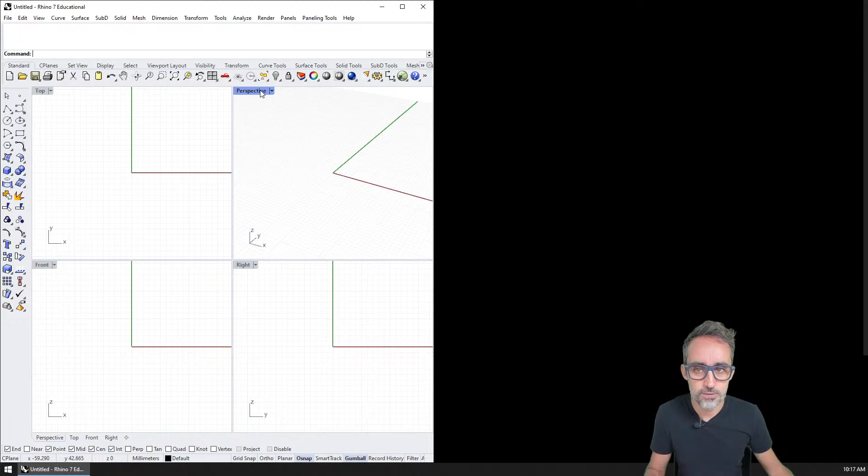Wait. What is my Rhino here? Okay. Any questions? I need to set up a couple of things. Any questions before we start? Any other? So 21, 9. What is it today? 29? It is 29. Yeah. Okay. And now I'm going to, yes.

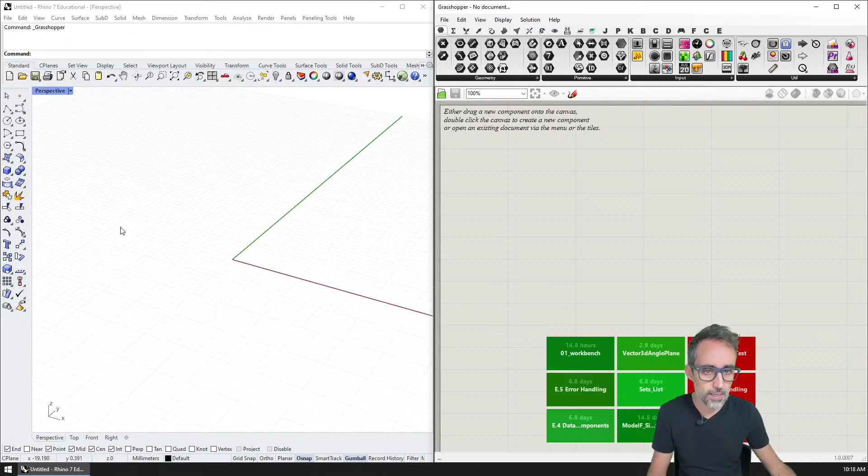So the next video is going to be persistent data. So what are we going to do? I'm going to record a video. What was the last video? In the last video we did error handling, and I made this video called Understanding Script Instances. And then we opened this, and then I started unpacking this and this and this, right?

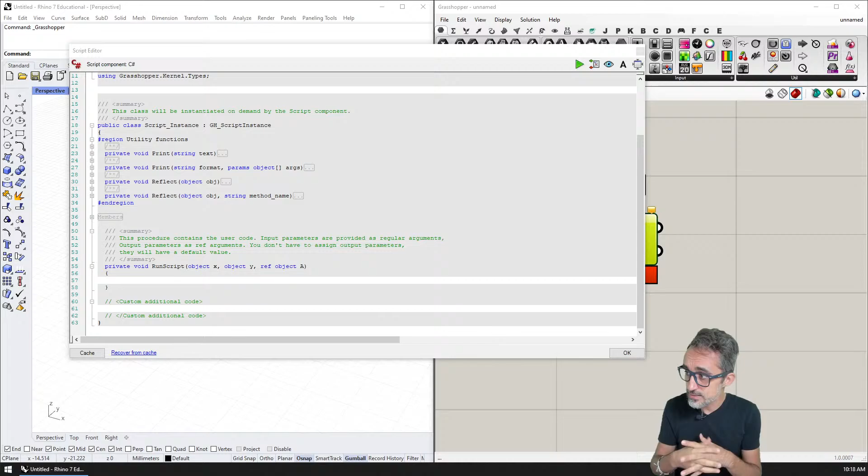And so what I would like to focus on today is this area here, custom additional code. I'm going to talk about writing functions there. Yes, I actually have it on my notes already. So we're going to write reusable functions there, and we're going to add a class. So the first one is going to be extending the custom additional code. That's going to be one video. The second video is going to be persistent data, that's where I'm going to talk about things that move around, etc.

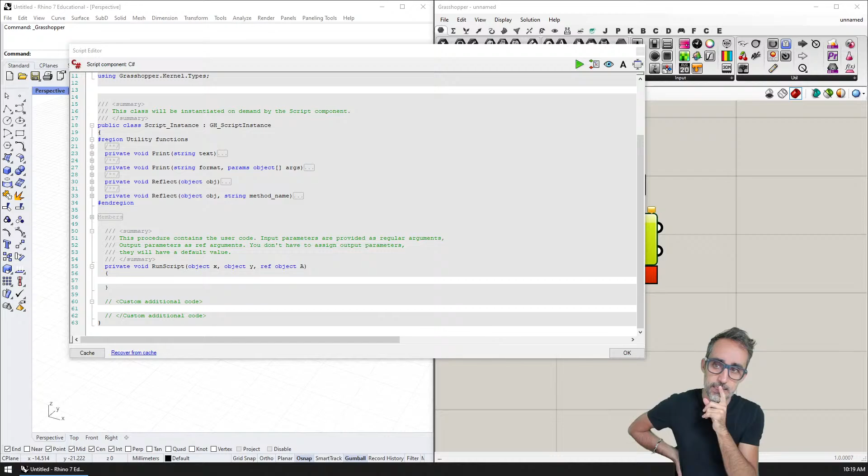Yes. That's what I'm going to talk about. Yes, exactly. So which example am I going to do? I don't need to do a complicated example here because that will come on the next. So in this video, I don't need an introduction. How am I doing battery-wise? I don't need an introduction. So how am I going to start this?

I'm going to start by double clicking here and explaining how using, okay. I'm going to start by showing this and showing how in the previous video we're talking about all these members and the utility functions, etc. There is the using, which I will talk about in a few, but I would like to focus here today on the custom additional code.

I need a good name for this video. I'm going to ask you for a name for this video. Yeah. What about extending script functionality? That sounds like a terrible name. Yeah, I'm not sure about that. Okay, I'll think about it.

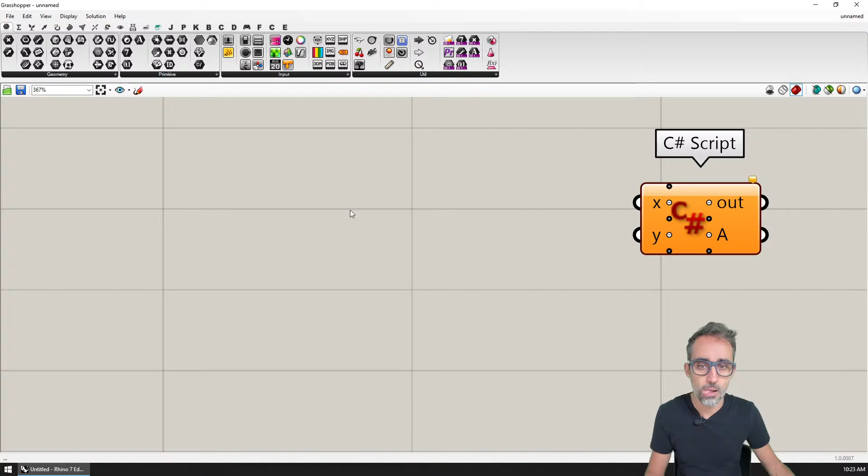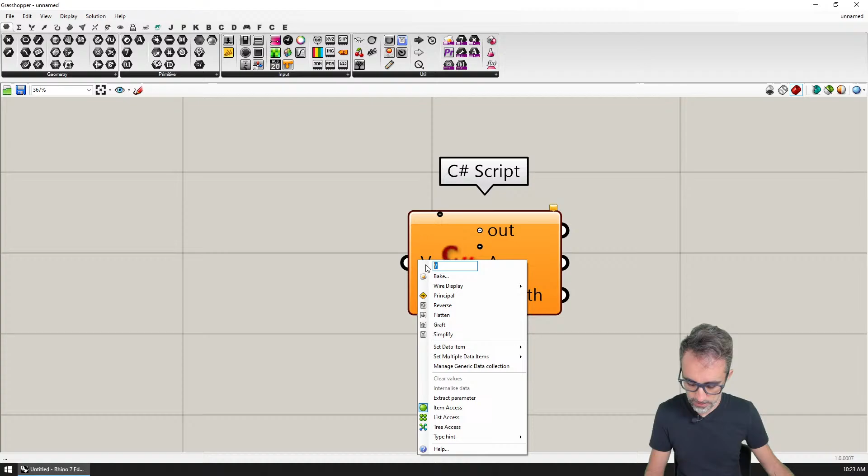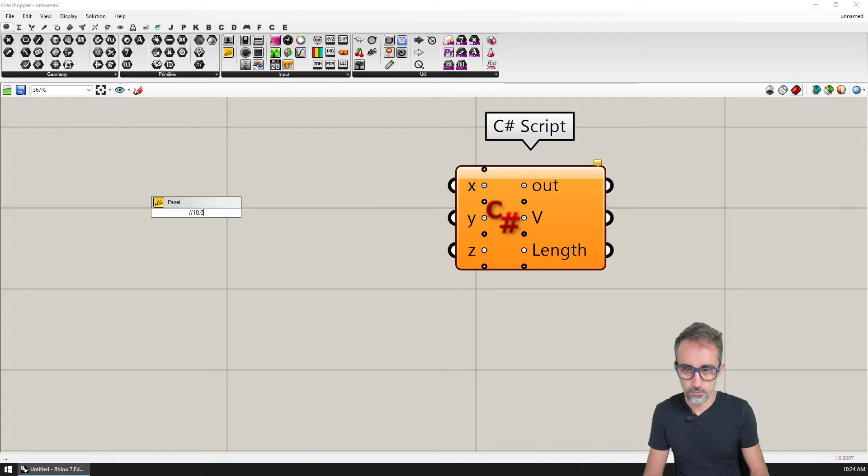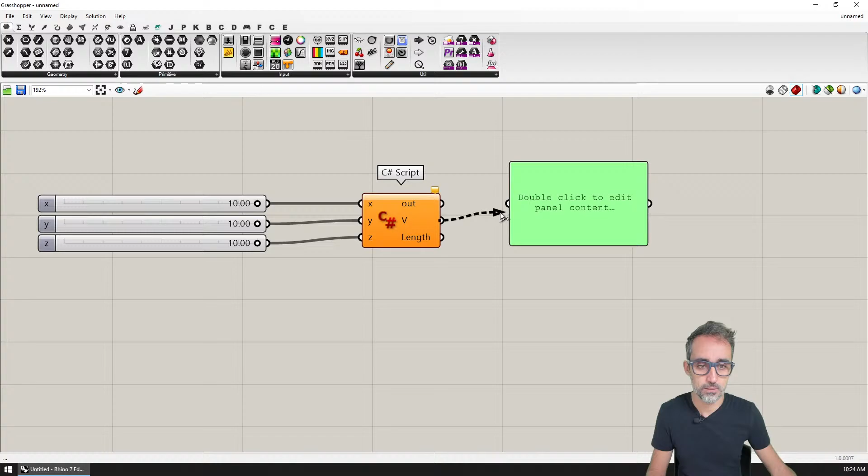I'm going to change this to A and B, for example. And then I'm going to create a vector here. Actually, no, why don't I do X and Y? Yeah, X, Y, and Z. And then this is going to be a double, and double. Okay, and then a panel here with the vector, and another panel with the length of the vector. And I'm going to keep it on the side. Okay, I think I'm ready to start. Let's do this.

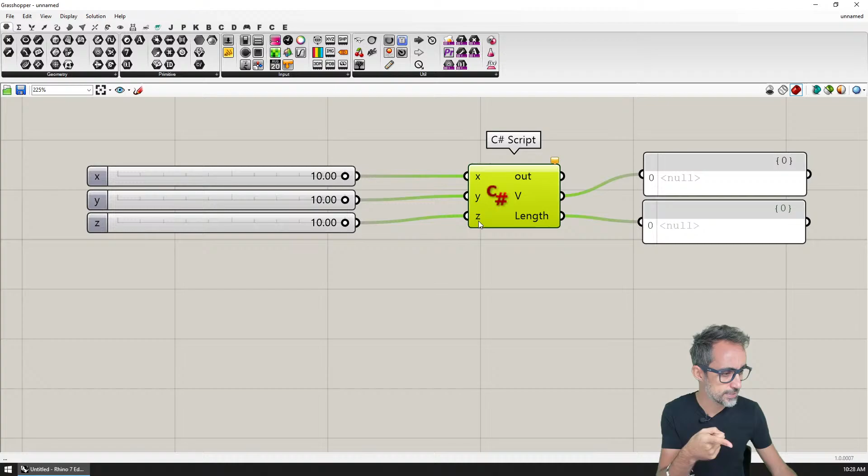So for example, I have here a component where I put XYZ as double inputs, and I hope to use this component to create a vector out of these XYZ coordinates and to output the length of this vector. There's actually a component just like this in vanilla Grasshopper. We already know that I can declare a variable here, Vector3d, and call it lowercase v, or vec, and that's going to be a new instance of a vector object with coordinates x, y, and z.

But let's imagine that we didn't have this for whatever reason. Let's imagine that we needed to make our own calculations for the length of a vector. So how would that work? Well, if I have the vector, we know that we can do an operation where we can say the length of the vector is going to be the square root of vec.X, so the x coordinate squared, plus the y coordinate squared. So that's going to be vec.Y.

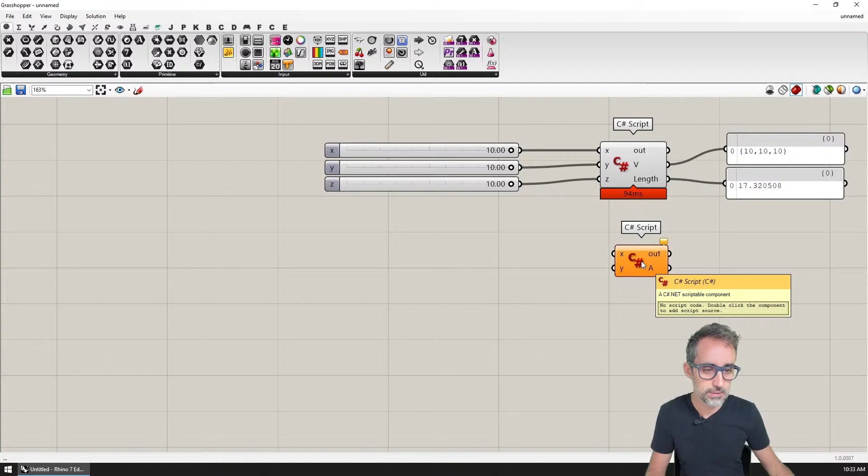Okie dokie. So I'm going to be talking about classes now. And I want to make an example of a person class. So I'm just going to leave this here. And I'm going to create another C# component. And I'm going to call this string. And I'm going to call this name. And this is going to be age. And this is going to be P.

Another thing that I can add into my script instance class, here in the additional code, is that I can actually write my own classes that I could reuse throughout the life of a script instance. So remember, C# is an object-oriented programming language, and very often when we work with a lot of data and with complexity, it's just easy and nice to encapsulate things in classes and in objects because it makes managing things much easier.

So, for example, I can do that by creating classes that live inside the script instance class. I created a new script component that is taking a string called name and an integer called age, and I'm going to output a class of the type person. So I'm going to create a class that I'm going to call person, and I'm going to give it a couple of properties.

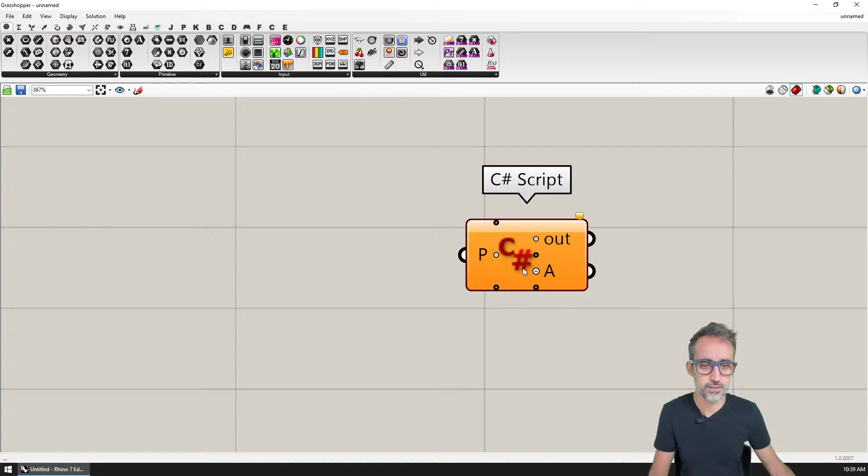However, the only drawback is, let's say I wanted to create a new C# script component that is going to take a person. Let me show you the problem here. I'm going to save this. This is going to work, and then this is going to be of the type System.Object because Grasshopper doesn't have a person class, because I just created this custom. So I'm going to take a generic object, and then I will try to cast it, and then the outputs are going to be the name and the age.

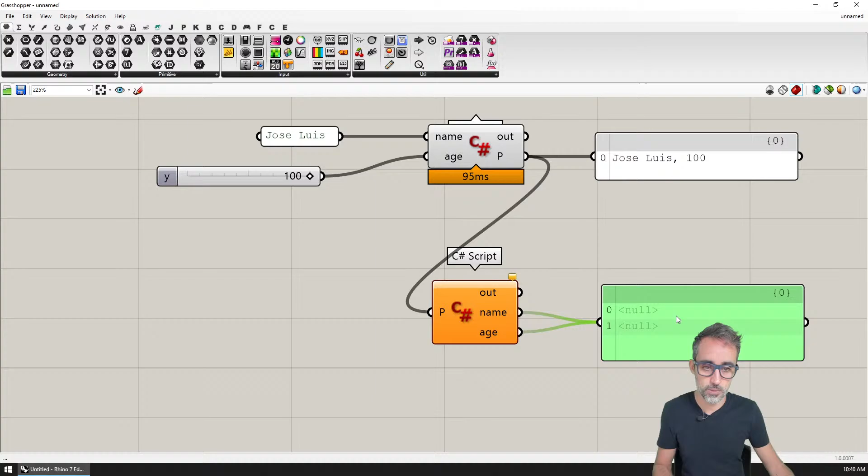So let's imagine that I wanted to write some code that would take a person class and a person object, and then spit out the name and age of that object. We might be tempted to think that since I have the class person in the first component, I can just copy and paste it here, and it's the same class, right? So I can declare a person object called person, casting the input P into a person class. Then for name output I take person.name, and for age output I take person.age.

So I would be inclined to believe that this could work, and this actually kind of makes sense. But if I do that, it turns out this doesn't work. The reason is that Grasshopper cannot convert this person object, the one coming from my previous component, to an object of this class. It just cannot. This conversion is not valid.

But wait, how does that make sense? It's the exact same code, I just copy pasted it from the other component. So why can they not convert from one to the other?

Well, it turns out that because this class was defined in two different components, even though the code and text are the exact same thing, because they were defined in two separate instances of classes, internally they have different signatures and different memory addresses. To the computer's eyes, they are different because they were created in different places and cannot be matched together. This might be counterintuitive for us because the written code is the exact same, but because they have different memory allocations and signatures, to the computer they just look different.

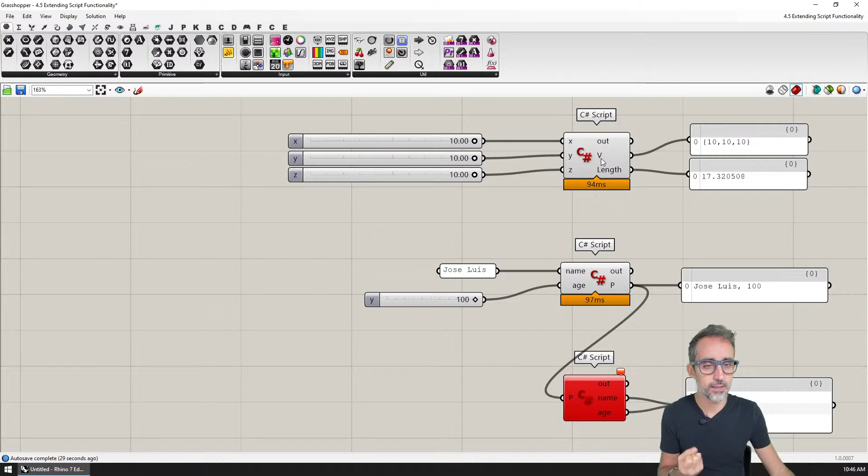If we do that, it turns out that this variable will be available not just to the functions that live here, but it will also be available here in the main code.

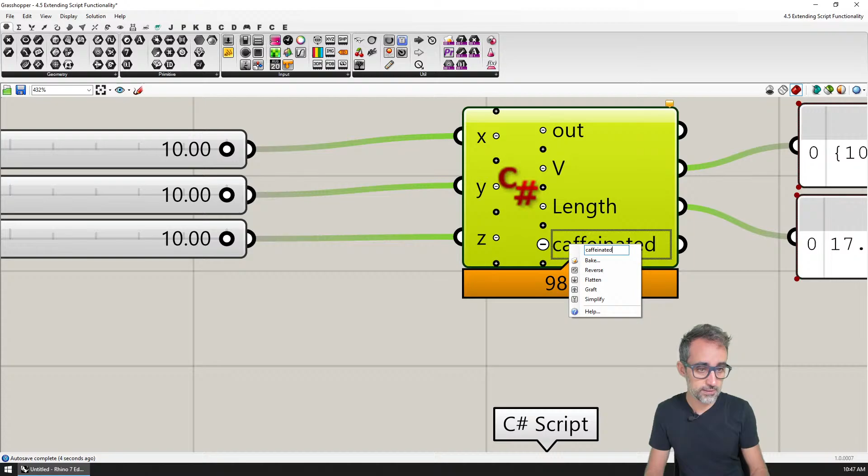For example, if I close this and write a new variable, caffeinated, and spit this out here as a panel, I can add to the outputs the value of this variable that has been hard-coded in the code. If I write this, now it's true, and if I change this, now it's false.

Why is this interesting? This is something I'd like to further unpack, because being able to declare variables outside of the main run script function is extremely helpful for things like having persistent data that lives in the Grasshopper component and doesn't change or get removed whenever we re-execute the component. That's going to be super interesting for creating dynamic simulations or giving the impression that the Grasshopper script has a life cycle of its own.

But I'm actually going to focus on that in the next video. Join me there as I talk specifically about using variables for persistent data, and therefore creating continuous execution of sorts inside of Grasshopper.

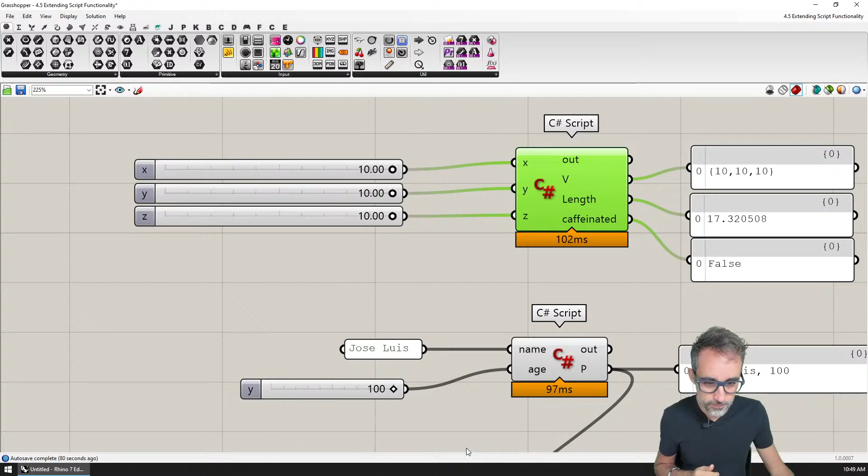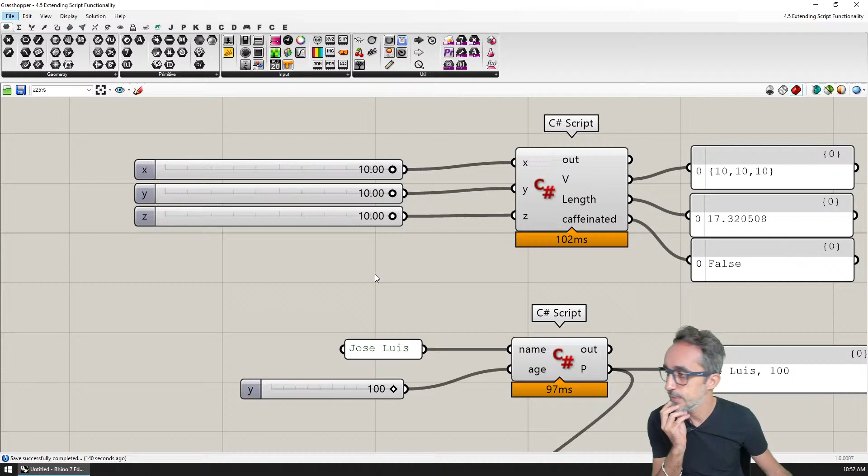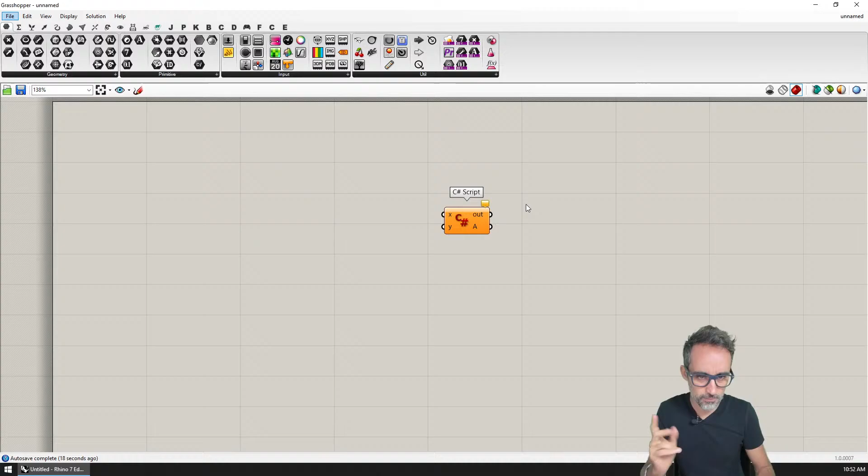All right, so what is the next video? The next video is going to be extending continuous execution in Grasshopper. So what am I going to do? First I want to show, I'm going to write the examples first.

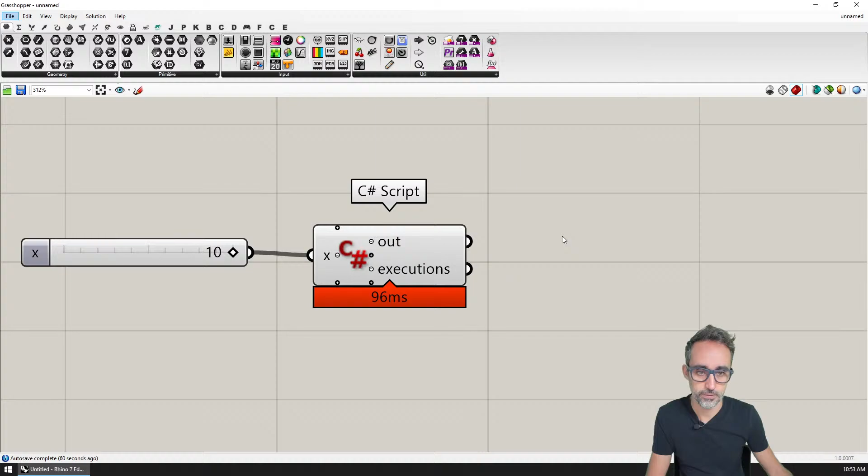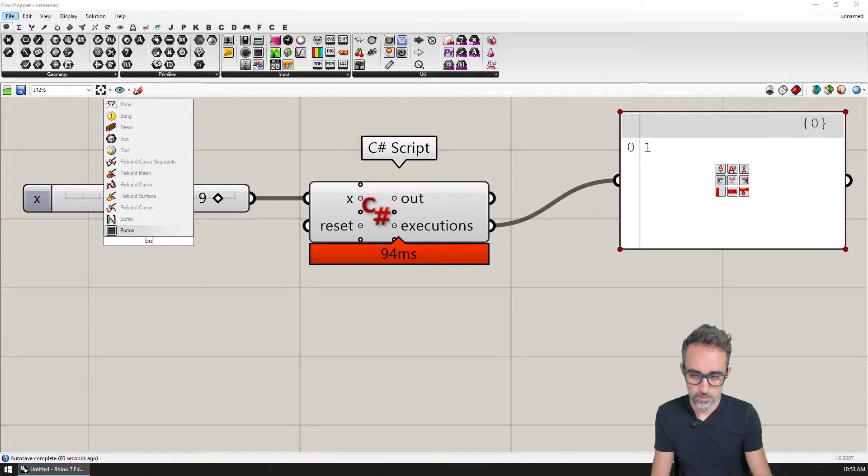All right, so that's one thing. Then I may want to add a boolean to reset, and we can just say button, and if reset is true, then iteration is going to be 0. So we can do that—reset—and then we reset. So that's going to be one.

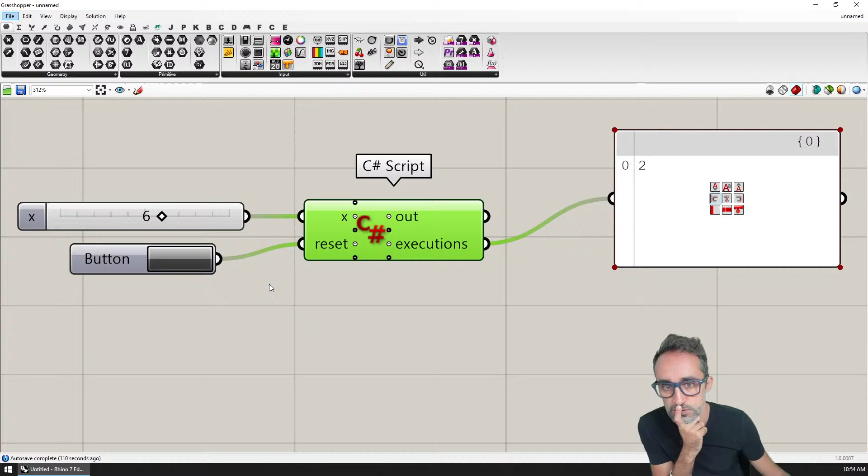The next thing we can do is, and I can probably put a trigger on this so we can see how this can actually execute on its own. So for example, we can do this. That's something we can do as well.

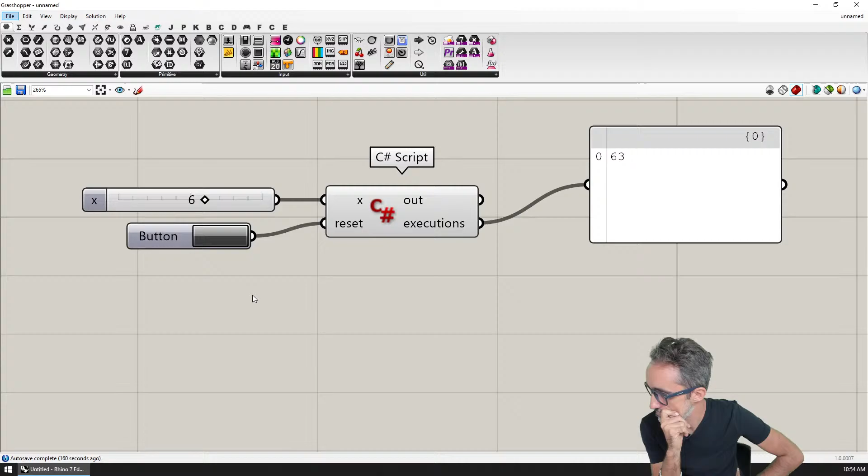Okay, and then what I'm going to do is create a point here. I'm going to create a point, and then bring the point inside. I'm thinking through the examples that I'm going to make for the tutorial.

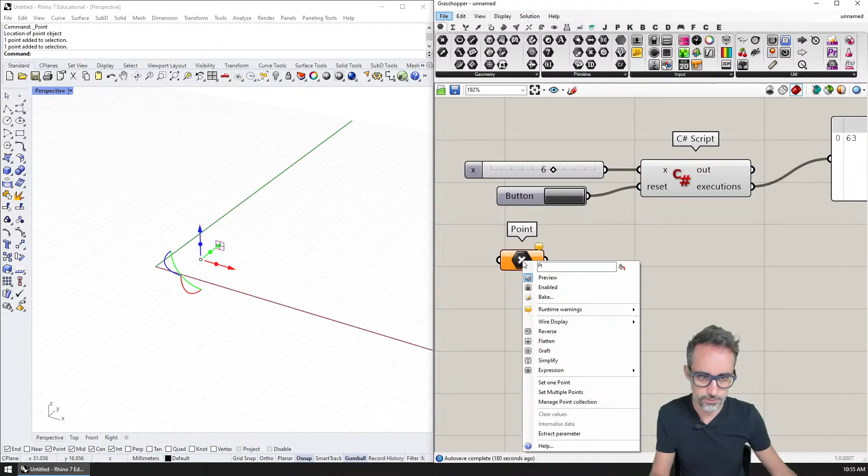I'm going to take this point, and after I do that, write something that takes the point, takes a direction vector, and has a reset flag as well. And then the point vector, and this is going to be x, unit x, for example this, and then it's going to have a button.

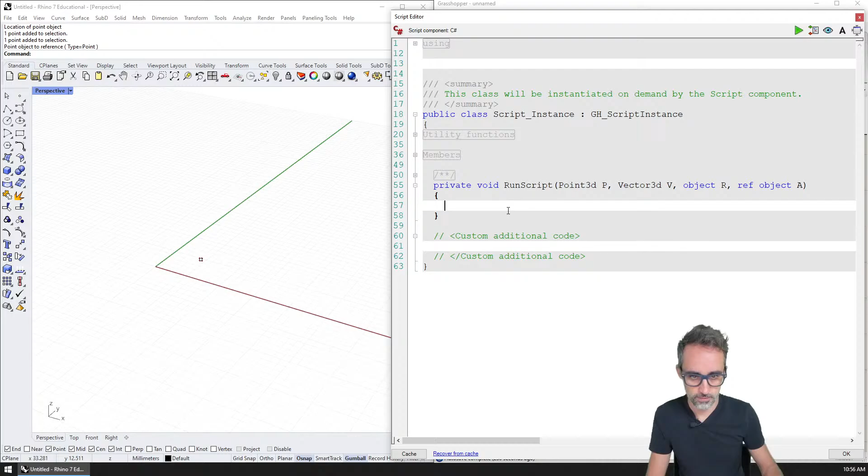So the full code would be: if r, which needs to be a boolean, if reset, then I have to have here a Point3d location, and if r is location equals - we're going to initialize it, for example, to Point3d unset. Then what we do is location is going to be equal to p, and location plus equals v, and the result a is location.

Okay, and if I do that, then what should happen is that I should be able to trigger this, and it's a null point, but if I reset, then this should...

I can reset that, and what I can also do is have some kind of guiding vector. Between 2 points, thinking of the examples I'm doing, I can draw a vector between 2 points, draw this vector display here and here, but I can also draw the vector on here. That could be cool, and then I can use this vector, you see?

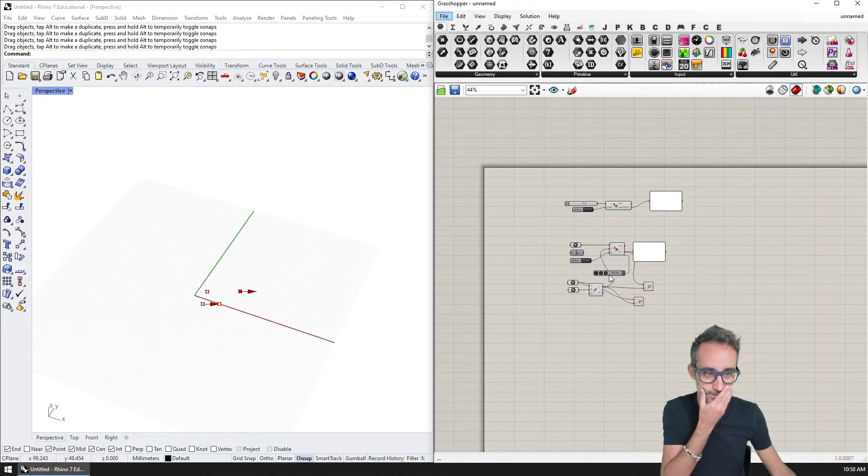All right, so okay, what do I do with this now? I'm just going to keep this somewhere here. And okay, so I have the examples. Now, how am I going to tell the story?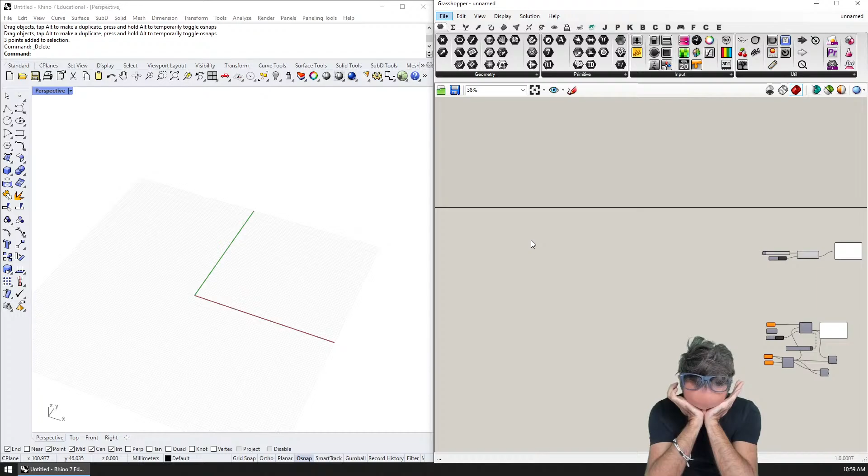How are we telling the story? Storytelling is very important when you record tutorials or teach. The story is we're coming from the previous video where we talked about extending functionality, and now we're talking about creating variables. But I think the point I want to make is that variables that we declare outside of the script function, they become...

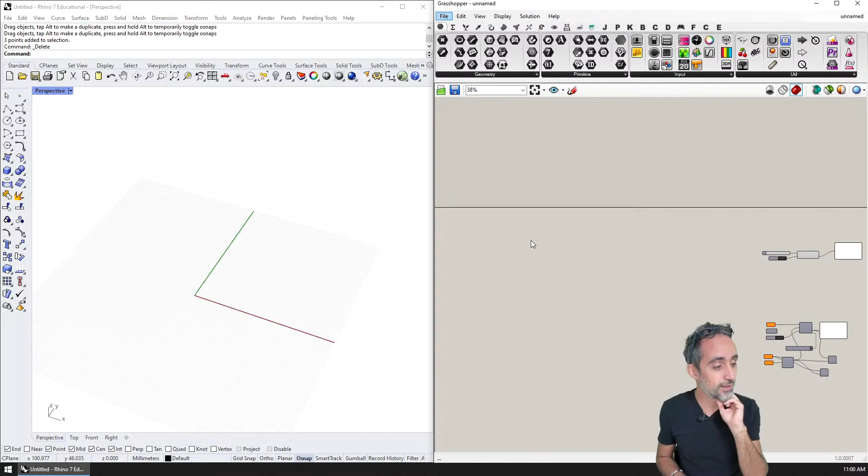Thank you, Arasto, I like being absolutely right. It doesn't happen always, but when it happens, it's nice. I might be wrong, Arasto, but I just think when I had to deal with this, I was looking through forums, etc., and even David Rutten was saying that this is just not a possibility.

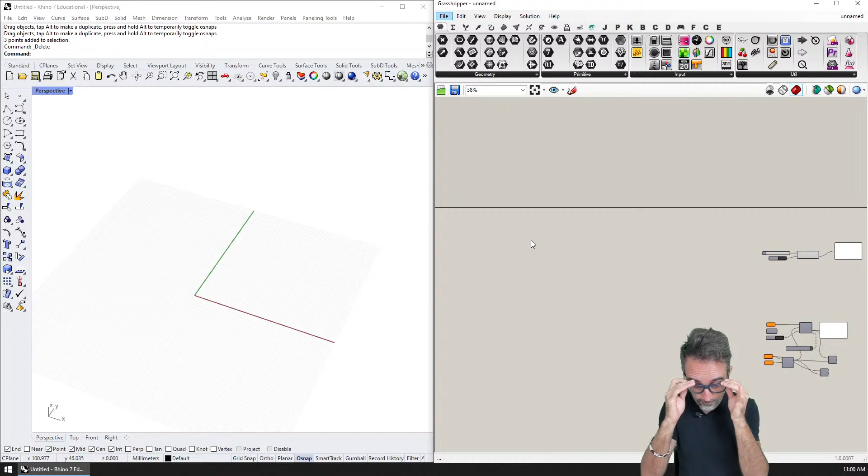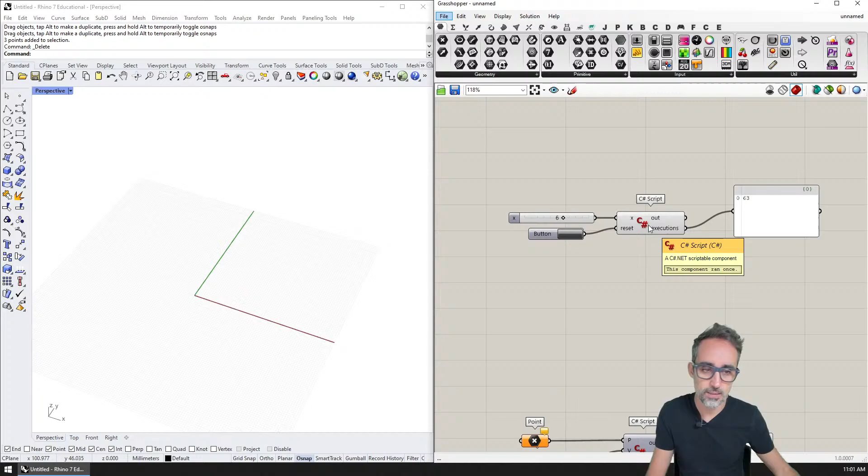Okay, so I want to make a case that the data is persistent because the component doesn't change when the function gets executed. So how do I start then? Let's say I wanted, for example, to measure - maybe I can start with the problem. Maybe I wanted to measure how many times a component has run. Okay, let's start with that problem, and then we can...

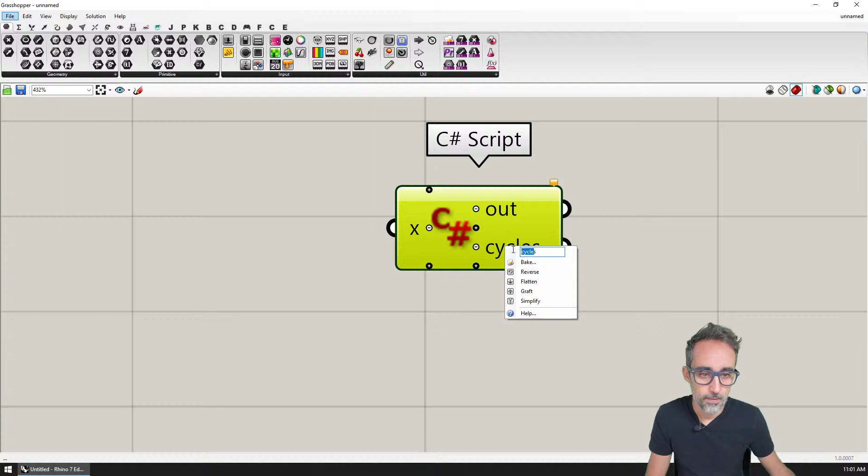Let me get to this. It can work as a trigger, Kartik, you're right, but then it updates automatically, it triggers itself, and it's a bit more difficult to control than that. Okay, let's start.

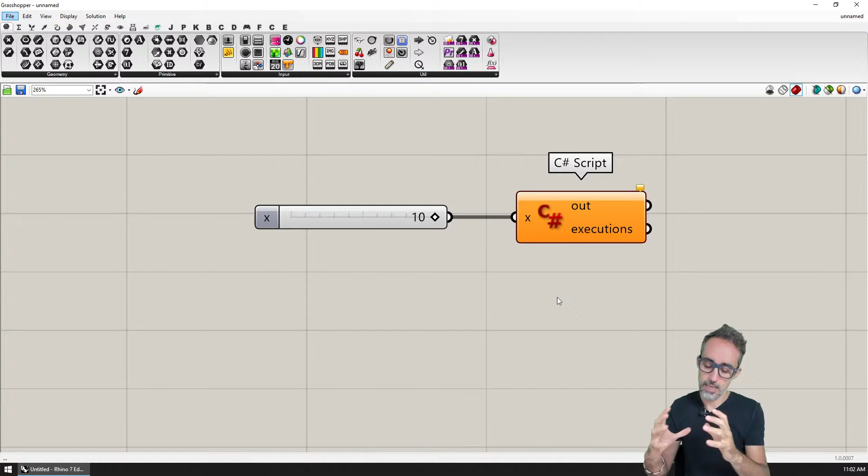Hi, this is Jose Luis here at Parametric Camp, welcome to another video in our series, Advanced Development in Grasshopper. In the previous video, I discussed this special section in Grasshopper's C# script components called the custom additional code. I discussed how we can add functions and classes here to extend the functionality of a component, but I also discussed how we can add variables. And that seems a little odd - why would I want to add variables? I can have whatever data I need coming in from the inputs, right?

Well, it turns out that what's really interesting about declaring variables in this area, or in C# terms creating members of the class that are not declared inside of a function, is that the data and values inside those variables all of a sudden become persistent. By becoming persistent, we break free of the paradigm that regular Grasshopper components have about data being volatile, only existing for a particular solution or execution. This has advantages when we want to do things more complex than regular acyclic graph computations, such as creating simulations or giving the impression of continuous execution inside of Grasshopper. That was a mouthful, but let's see examples of what I mean.

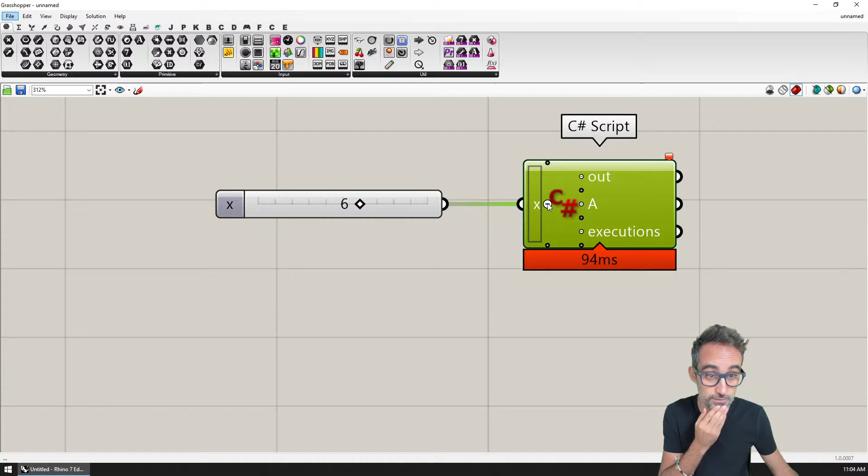Or it changes with the scrolling of a slider. And this data could be used for this component for whatever calculation. I don't know, calculating half of the value. It doesn't really matter. But what I wanted to do is, on top of whatever calculation this does, which is, for example, calculating that A has to be equal to x divided by 2. And actually, in order to do that, I should turn this into a number, which I absolutely forgot, all right? So A is going to be 6 divided by 2, whatever.

Just some random calculation. But what's interesting for me is that I want to use this component to also calculate how many times in the life of this component it has been executed. So if I'm scrolling this, how many times has this value been calculated by this component? Or in other words, how many times this component has executed the RunScript function.

Correct? If I wanted to do that, I might be inclined to say, well, let me define first here a variable that I'm going to call iteration, initialize it at 0, and then every time I run the script, I'm just going to increase it by 1 unit. And then here over executions, I'm just going to output that value. Let me plug in a panel here. Right now I get the value of 1, but as you can see, as I keep executing this component, the value of 1 is not changing.

And it's not changing because, if we remember the rules of variable scoping, variables have the scope of the block of code in which they were declared. Because int iteration has been declared inside of this function, every time Grasshopper executes this function, this variable gets created, it gets a value of 0, it gets increased by 1, and it gets output. But as soon as we hit this curly bracket, this variable expires, it ceases to exist, and therefore its value doesn't carry on to the next time we execute this component.

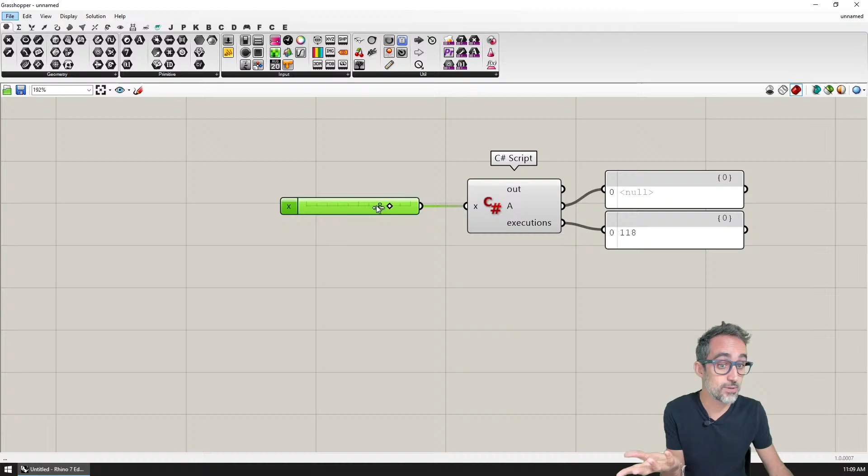You may have seen that when I changed the code and executed, this number went back to 0. That is because changing the code changes the whole thing, because Grasshopper internally needs to recompile this C# script component, and therefore this gets reset to 0. Everything gets created again. But that only happens if I actually change the code. If I just keep this here forever, this number is going to keep increasing forever. Right now I'm using this input just as a way to trigger this component to execute again, even though I'm not using the actual value at all.

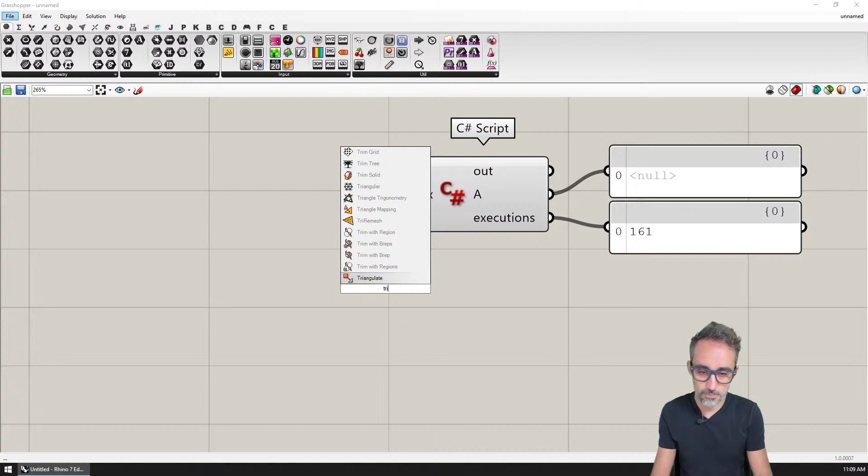And in that same spirit, let's see what happens here. I remove this because now there's no input. This gets executed again. But if you remember, there's this other component called the trigger. The trigger is a component that is very popularly used. You can drop it, you can link it to a component.

And the trigger is a component that does this effect called ticking. And ticking, in computer programming, refers to activating or triggering something without really caring about the data that is triggering that event. Okay, so if I do that and I press play here, you can see how the trigger actually does tick this component and it forces it to execute again.

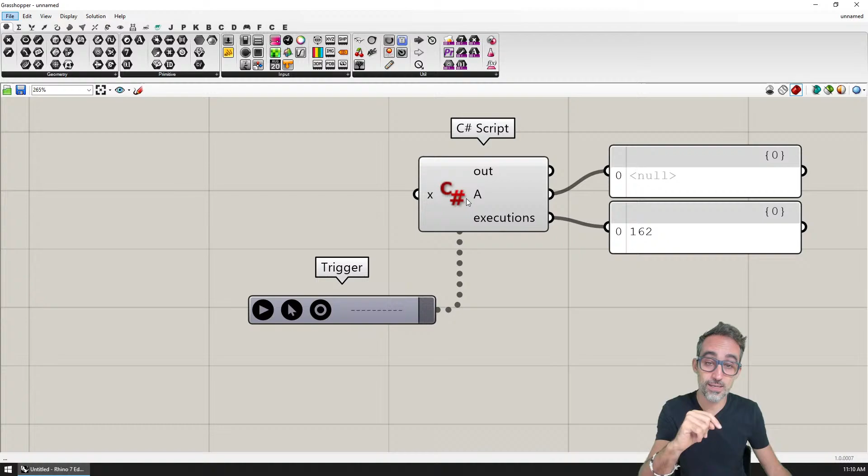And if I set a timer, for example every 100 milliseconds, you can see that this component is ticking and is forcing this component to run the script again, and therefore this component keeps increasing.

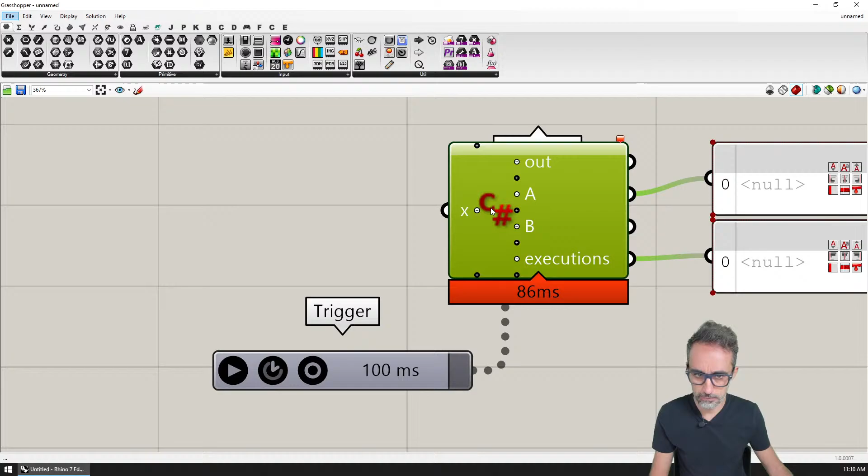For example, let's say I'm going to declare here a value that is going to start at 2, okay? And then every iteration, value is going to be equal to whatever it was times 1.2, for example. And I'm going to declare another output here that is going to be B, and then B is going to be equal to that value.

Okay, if I do this, now you can see that B has the value of 2.4, but if I now execute this, you can see how this value is going to start increasing exponentially. Not exponentially, but it's going to start increasing until it reaches a very large value. You see, because this data is persistent.

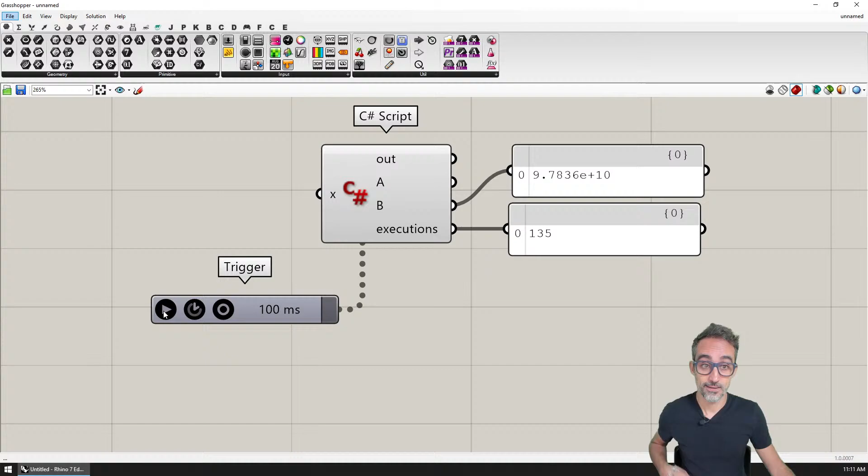Okay, shall we take a look at a cool example of how this can actually be helpful for doing simulations? Should we write something where we can move a point dynamically in three-dimensional space?

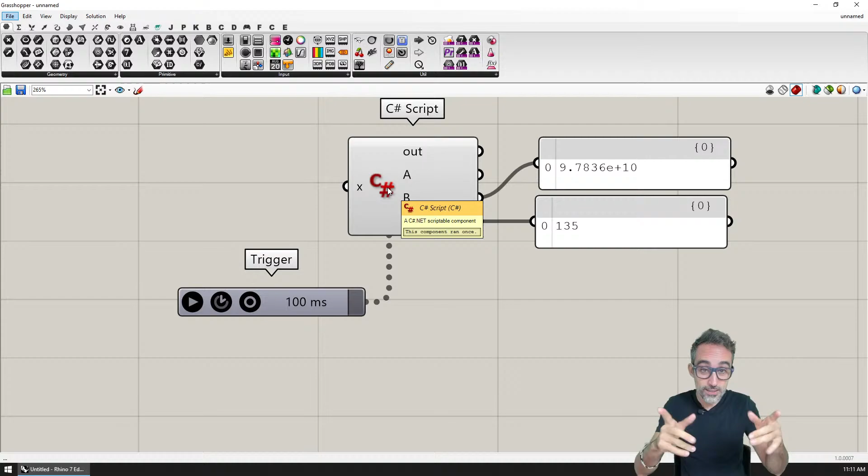Well, before we do that, I actually forgot that I wanted to figure out a way, because right now this keeps increasing forever and ever. And if I did not have the capacity to actually change the code, I would not be able to reset any of these values. Is there any way that I can implement, without changing the code, a way to reset any of this? I think there is.

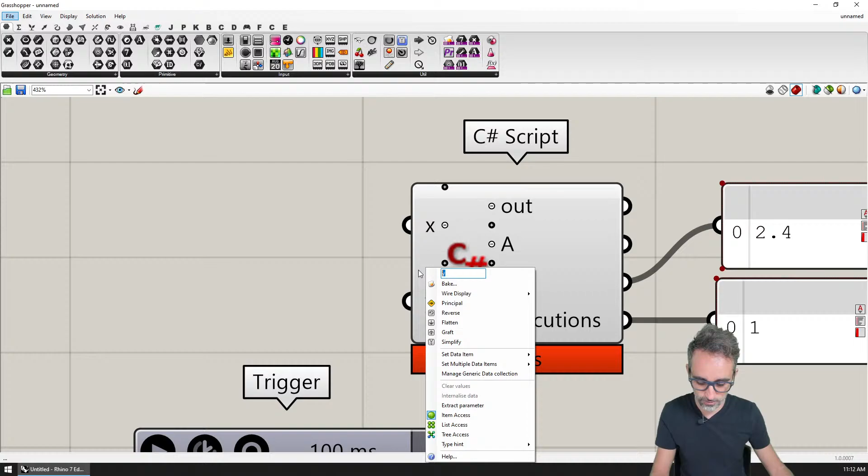So let's say that I'm going to include a new input called R, which is going to be of the type Boolean. Okay, if that is the case, I'm going to put a button here, and then I'm going to double click and I'm going to use this flag, this input, to reset all the values.

So the only thing that I'm going to need to add is if R is true, or we know that we can shortcut this, if R is true, then we can say whatever IT was before, I don't care anymore, I'm going to force it again to become 0. And whatever the value of val was before, I also don't care, I'm going to initialize it again to the value of 2, right? So let's take a look.

I'm going to use my dummy input to manually force some updates here without the trigger, okay? I can also use the trigger, that's perfectly fine, but then if I press the button, you can see that I just reset everything. And it's interesting because I press once and it gets reset, but as I release the button, that triggers another update.

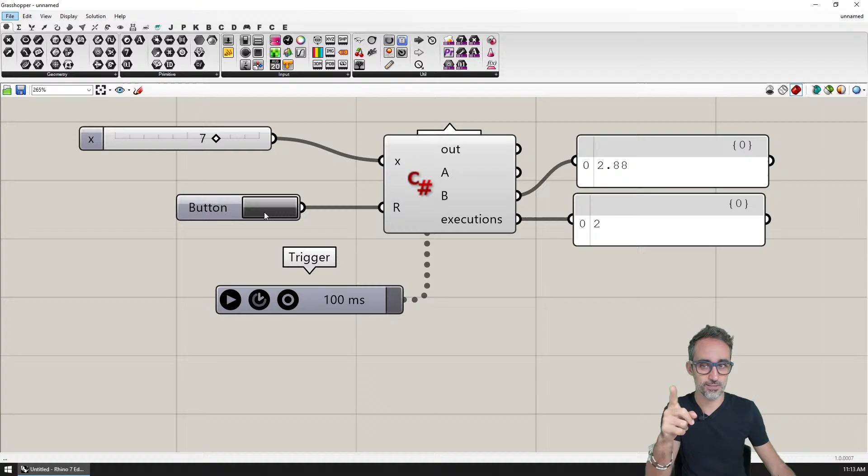So now this component has been executed twice. You see how interesting that is? Because this input goes from true to false, and that's 2 executions of this input. So I could have this running infinitely, and I can have now a button that I can use to reset these operations as we go.

Okay, beautiful. I think it's time now to see an example of how we can apply this to moving geometry or simulating geometry.

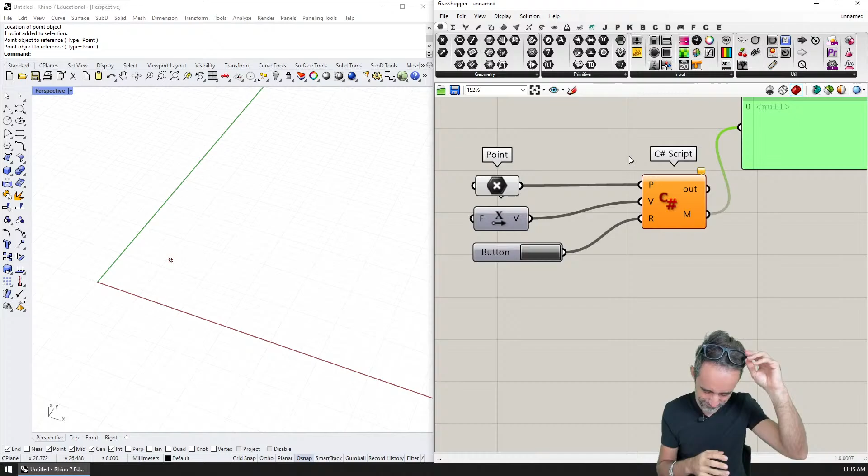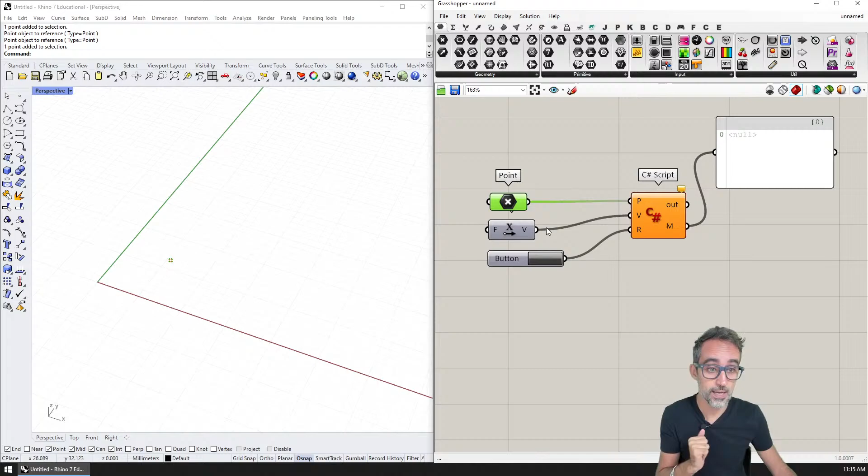So for example, I have created this scaffolding component. I have created a point in Rhino. I have brought this point with a parameter component here, so I have the point now inside of Grasshopper. I have a unit vector in the x direction. We will change that soon. And I have a button just to reset the component. And the component has those inputs as points, as vectors, and as a Boolean.

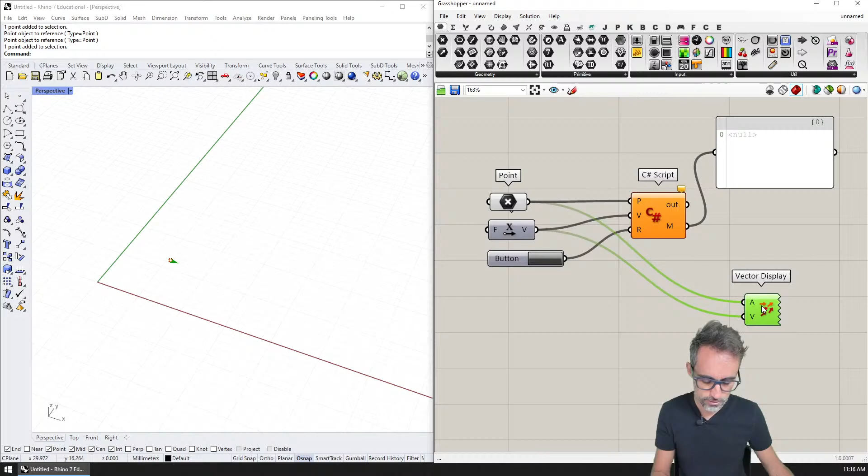And then what I would like to do is write a simple dynamic simulation where every iteration of the calculation, this point is going to be displaced by this vector. Okay? And just to do a vector display, I'm going to display the direction of the vector. So that's this one. And this is going to be the point. So I will also want to show the point being moved by this vector in this direction.

Okay. So what I'm going to do, you see how my inputs are a point P, a vector V, and the reset flag. So what I would like to do is write some code that takes this point, and every time we update the component, it moves the point along the vector direction.

So the first thing I need to do is create a persistent point, a point that I'm going to use to store all the values that are changing and that is not going to be reset every iteration. I do that by creating it here outside of the RunScript function in the custom additional code part. So I can say, for example, Point3d, I'm going to call this current location, a really long name, okay? And because Point3d is a struct, it needs to be initialized. It cannot be null. That's one of the properties of structs versus classes.

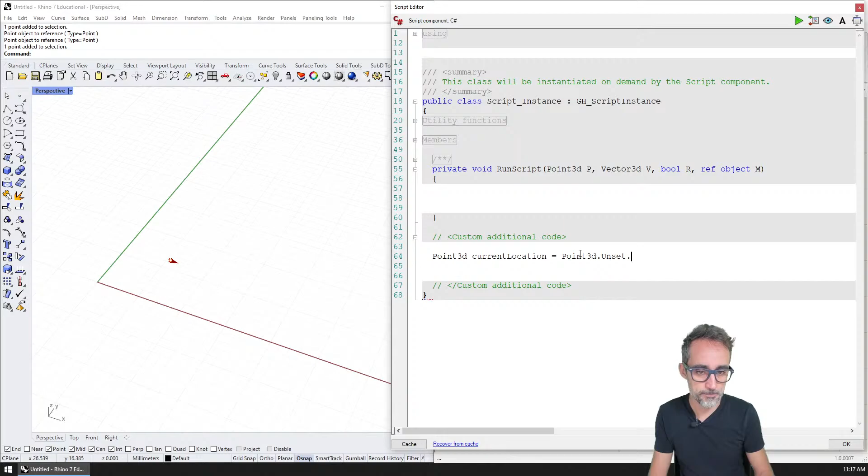So I have a card. There should be a card popping up to structs versus classes somewhere in the description. And I need to initialize it to something. So Point3d actually comes with a particular version, which is Unset, which is basically a point that has no valid values. Or I could also, for example, initialize it to new Point3d(0, 0, 0). It doesn't really, well, it does matter, but we're going to see why.

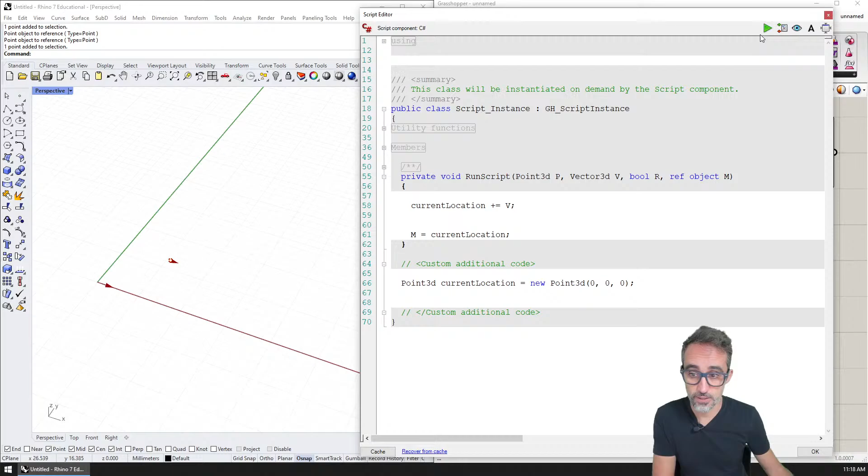And then what I would like to do is every time I execute my code, take the current location, and whatever it is, I want to update that point and move it by the v vector. So my moved point is going to be whatever current location was. If I run this code, you can see that my point is right here. Let me highlight it. The point is right here.

And if I put a trigger and I start updating this every, for example, 200 milliseconds, you can see that the point is moving every iteration, every time we hit it is moving 1 unit in the x direction. You see that? All right. Now, there's a couple problems here. I started at 0, 0, not at the point that I wanted. So could I change that?

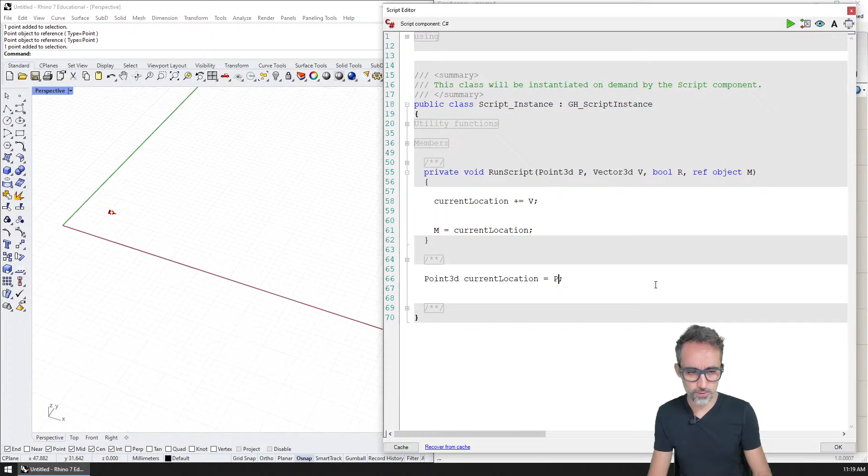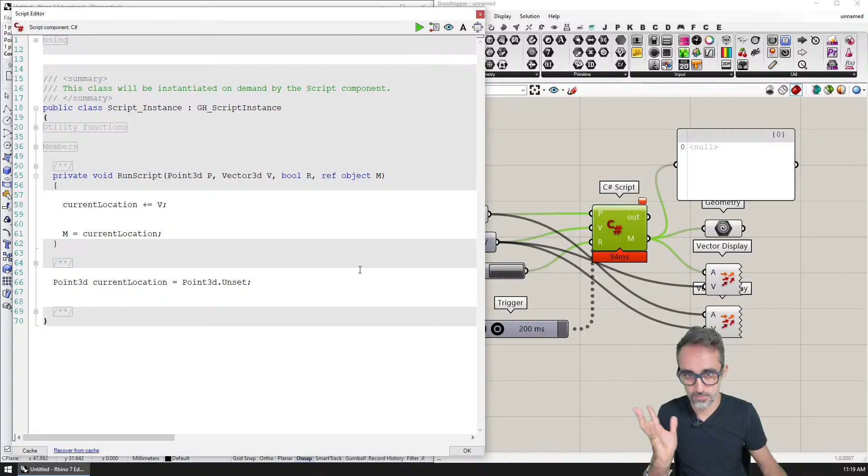So for example, maybe we could say current location, I want to initialize it to P. But you see what the problem with this is going to be? If I run this, I get an error which says that P doesn't exist in the current context. That is because P is a value that is coming into the component, and because of the rules of scoping, this variable only exists in this block. It doesn't exist here. So that's why we start the point with an unset value, so that the component doesn't work unless we do a particular thing. You see, it's a null point.

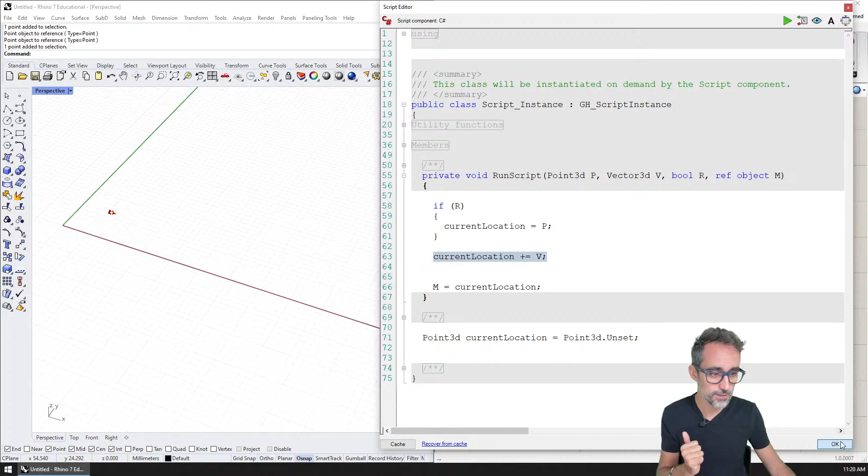And then how can we fix that? Because we have the reset flag, we can say if reset equals true, then I make sure that I reset everything. So current location is going to be equal to the initial point. And then after that, I'm going to update it. What's beautiful about this is that now this code is not running because, by default, the point is set to this invalid point called Point3d.Unset. But as soon as I press reset, we forcefully initialize current location to the value of P, and from there on, we can start working with that vector and simulate it.

All right? Beautiful. And I can reset, and now we basically have a moving point that we are simulating, right? We are calculating its new position every 200 milliseconds, and we are changing that position by a particular direction vector that in this case is unit x. But it didn't have to be unit x. What if the vector was a vector that I was controlling dynamically in real time? So I'm going to take those 2 points, 1 point, another point. I'm going to create a vector between those 2 points.

I could do this with C#. I'm just doing it manually for the sake of speed. And then I'm going to use this vector. I'm going to plot this vector here. This is the direction vector. And I'm going to use that vector here. Okay?

And the result of that is going to be that if I reset, you can see that the vector is moving, but I can move the vector. If I change the vector, you can see that I'm dynamically controlling with these 2 points the direction that my point is moving along. And the speed, because if it's a long vector, then it moves very fast. If it's a short vector, then it moves much slower.

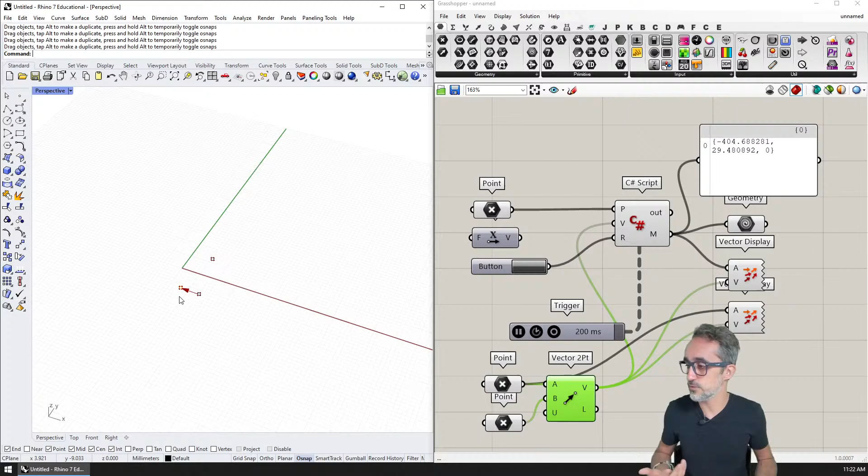But I would like to take some time on the next video to make a few examples of how we can create components that work with geometry dynamically and with changing states of geometry, which is a technique that is very useful, for example, for simulations. Okay, so if you like this, I think you're very much going to enjoy the next video. It's going to be a hands-on one. So hope to see you in that video.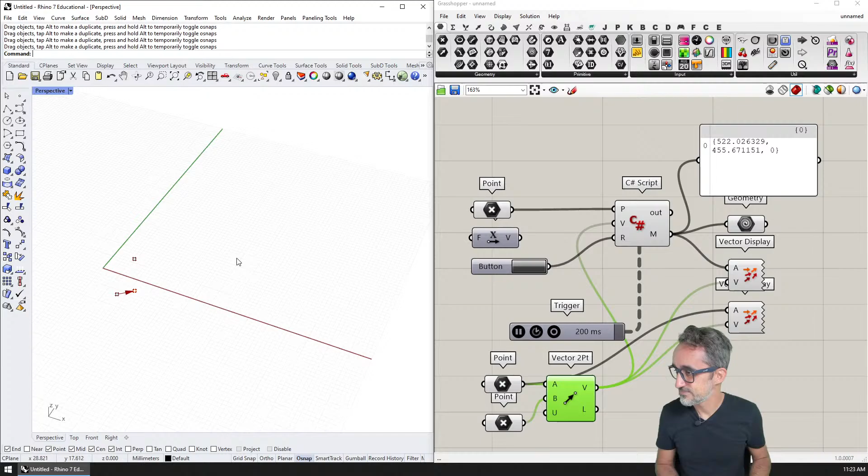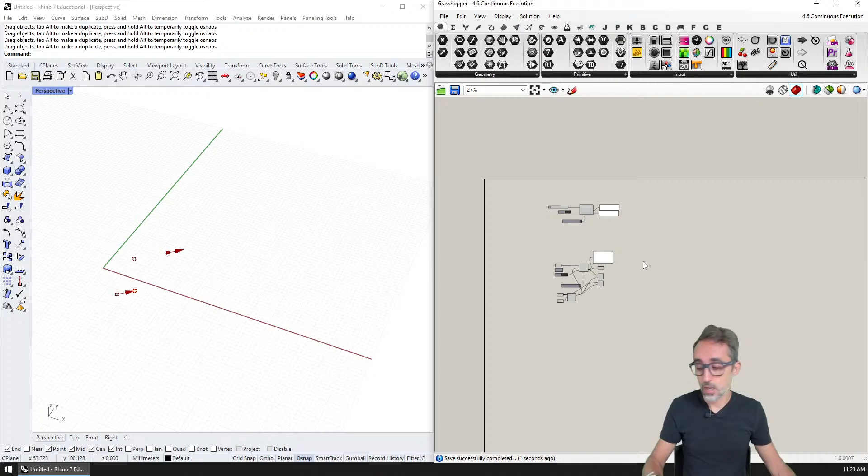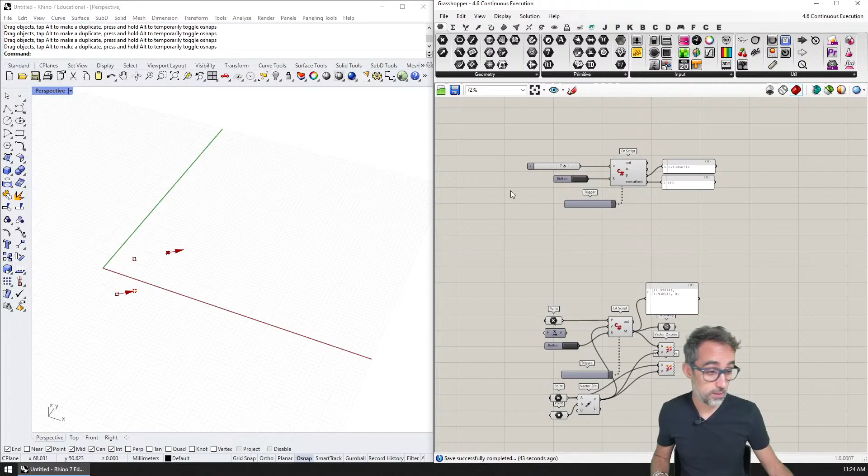All right. Well, that was a lot. I kind of have a headache. 4.6. Continuous execution. How are we doing? Was this fun? Oh. All right. Okay. Oh, I do have a headache. A very nice one. Oh, God. Okay.

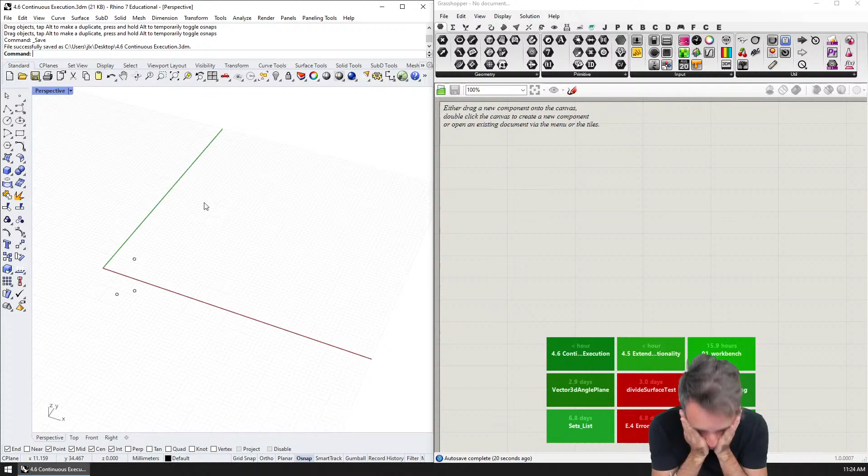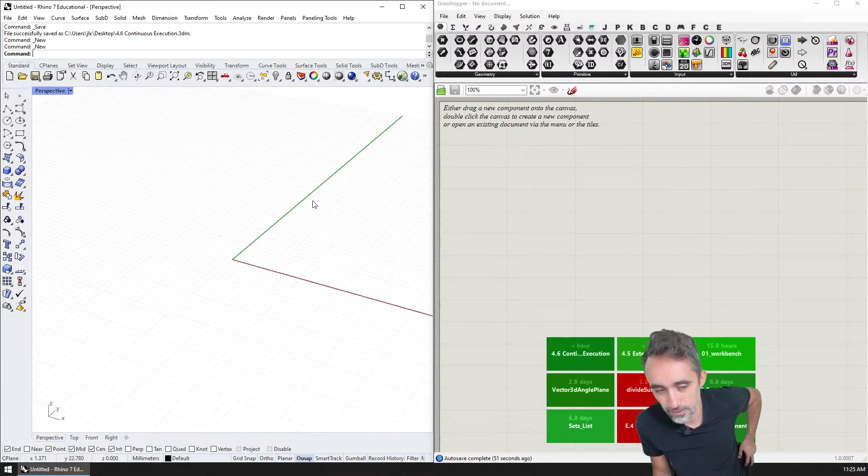So, the next video is going to be continuous execution. So I wanted to make simulation components. Thank you, Richard. I wanted to do simulation components, but I don't have the examples done, of course, and I think I don't want to do them live. I guess what I want to say is that I would like to spend some time putting together the code first, so that I have a guide, and then when I record the videos, they are much cleaner.

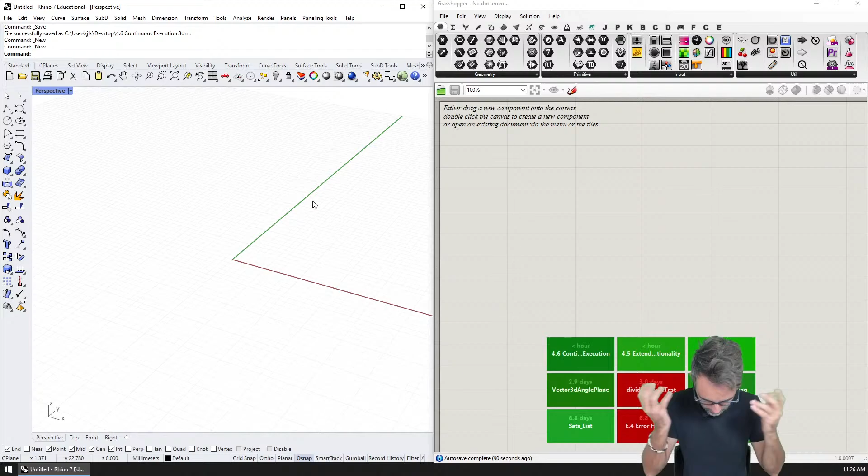There's no big difference, Arasto. It's just that using the trigger is an external way of ticking the component, whereas that way that you specify, it's internal. It's code that you hardwire inside the component. But they're basically both the same concept.

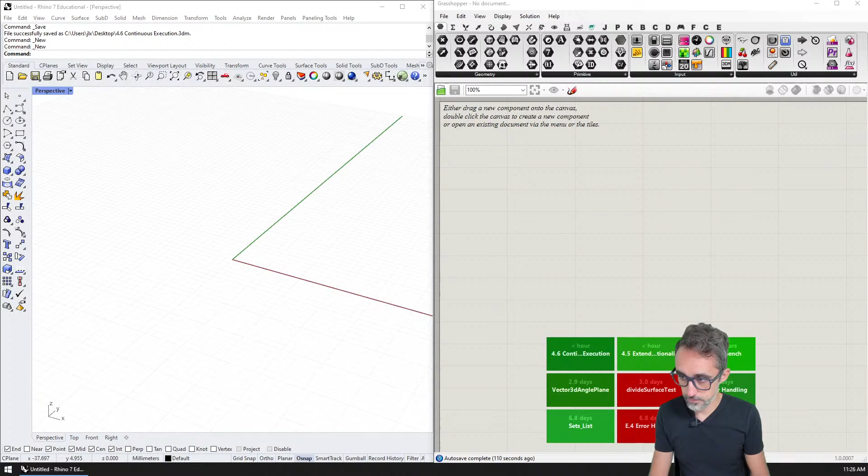And you know what? I have a little bit of a headache, so I think I'm going to stop this live stream, and I'm going to go take some medicine and run a couple errands, and then I'll be back in the afternoon, and we will spend whatever time we need to prototype the examples, and then if we have time left, I will record the video for the simulation components.

I want to make one simulation that is going to be a rectangle and a point, and the point is going to be bouncing off the rectangle. That's going to be one thing. Another one that I want to do is draw a pendulum that swings over gravity and that has friction, gravity, whatever, and then it gets simulated.

I would like to simulate, like in Kangaroo, having 2 points and having an elastic chain between them. And I would probably want to do a similar one that is just one chain. I will not be covering multi-threading at this point, Richard.